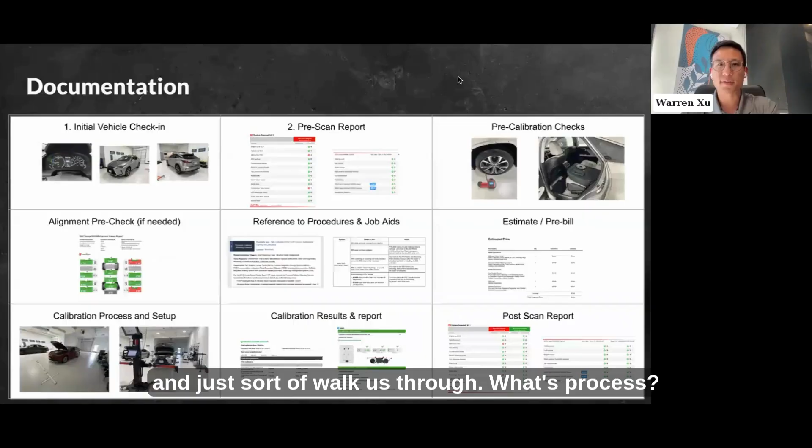So next we're going to move on to documentation. This will be a bit more of show and tell, if that's okay. Tony and Jeromy, I'm going to pass it to you guys to just sort of walk us through your process and what kind of documents you're keeping, what kind of documents you're submitting to insurance.

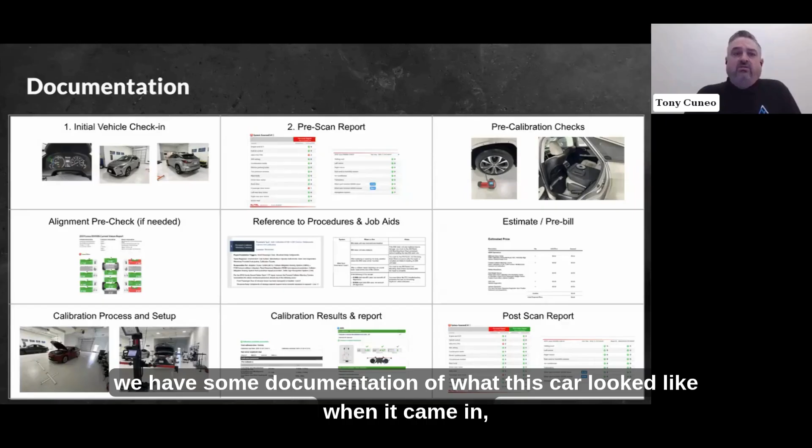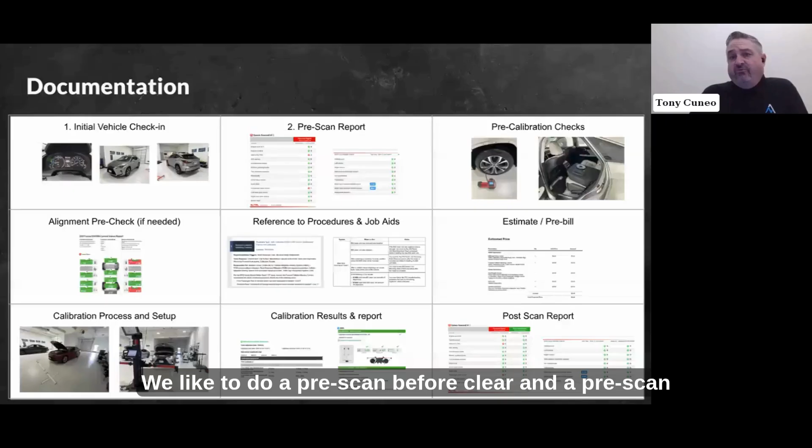So yeah, when we walk up to a car, we're going to scan it. We're going to take some photos of it. We like to get all four corners, so we have some documentation of what this car looked like when it came in, specifically focusing on the damaged area. We're going to picture the mileage and the VIN. Then we're going to get the pre-scan. We like to do a pre-scan before clear and a pre-scan after clear to see what's really related to the accident, see what codes are hard faults, and assess those from there.

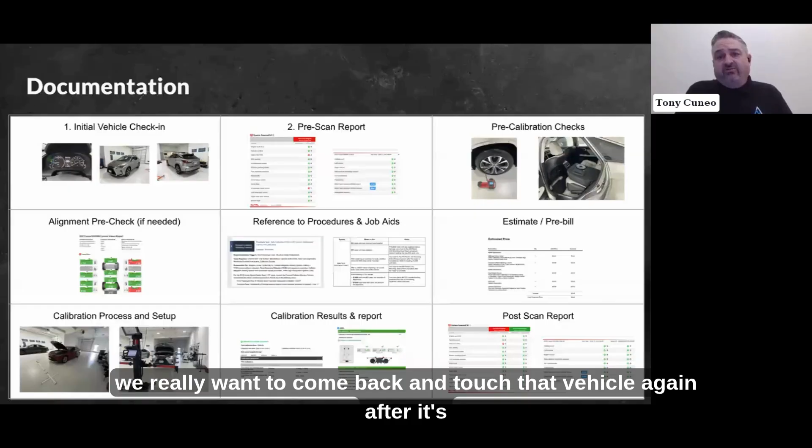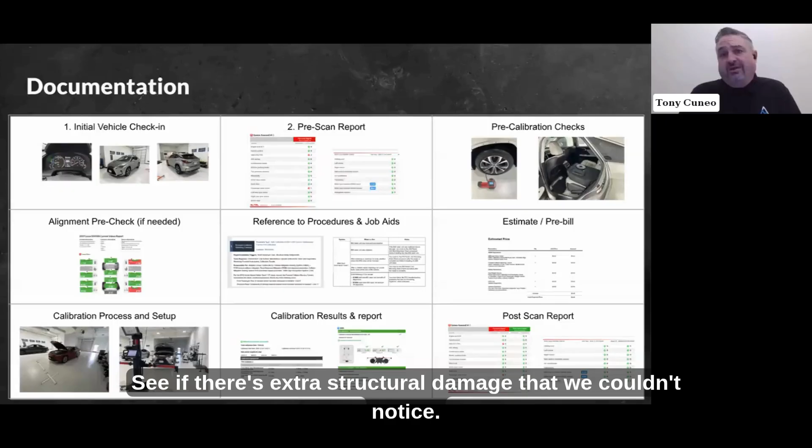When the car's coming back to us, I think even before a pre-calibration check, by checking tire pressures and fuel level, we really want to come back and touch that vehicle again after it's torn down to see if there's anything that we missed during the pre-scan process, to see if something got damaged under the bumper that we couldn't see, if there's any wiring damage, things like that, see if there's extra structural damage that we couldn't notice. So coming back to the car and getting hands on it after teardown is a really important step in our process.

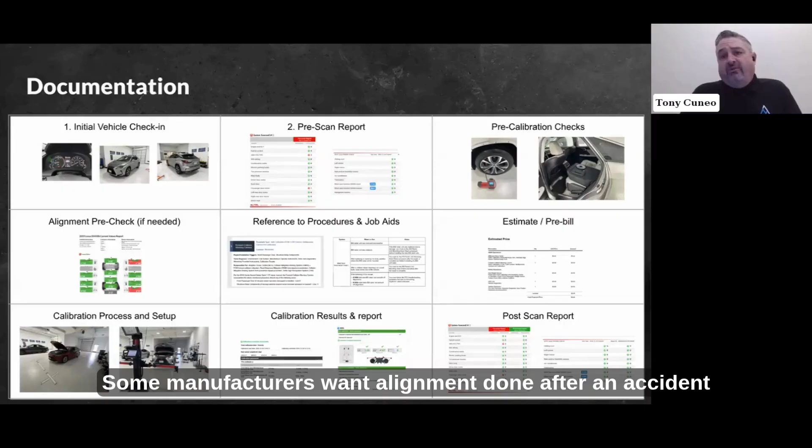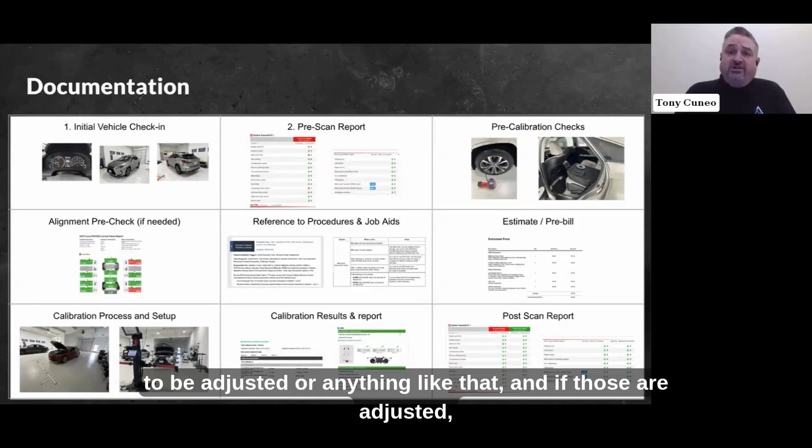Some manufacturers want alignment done after an accident, or at least checked. So getting it on the alignment rack and seeing if any calibrations or alignment angles need to be adjusted, and if those are adjusted, what calibrations are triggered because of it. Then digging into service information and supplying that documentation. We have direct access into the estimating software for the companies that we work for, and we're able to load those right in there, so there's no emails or anything lost in translation.

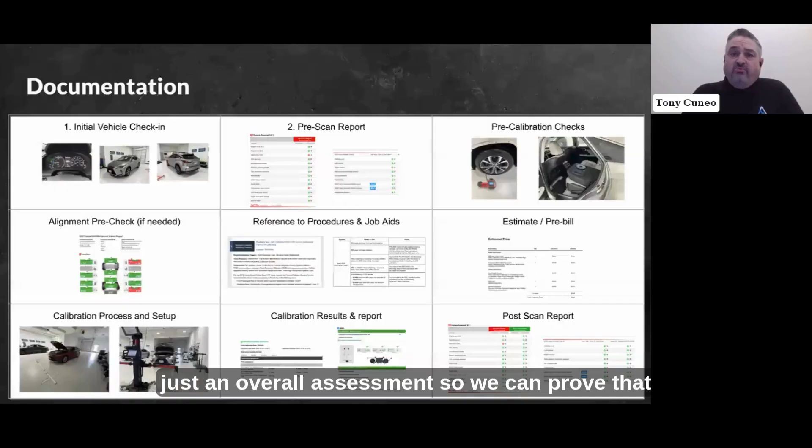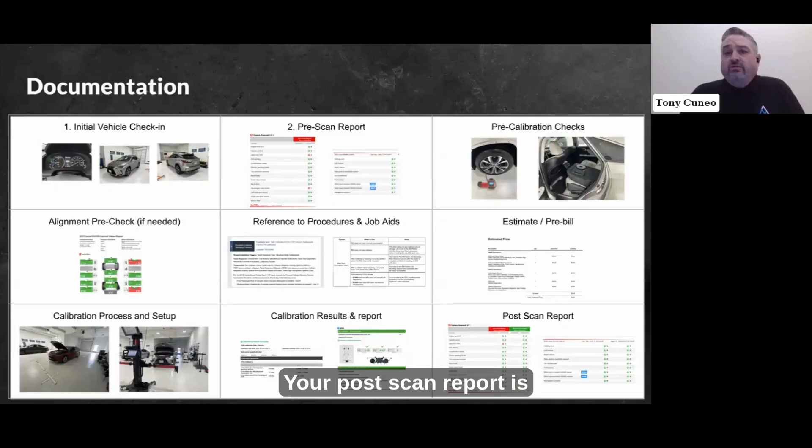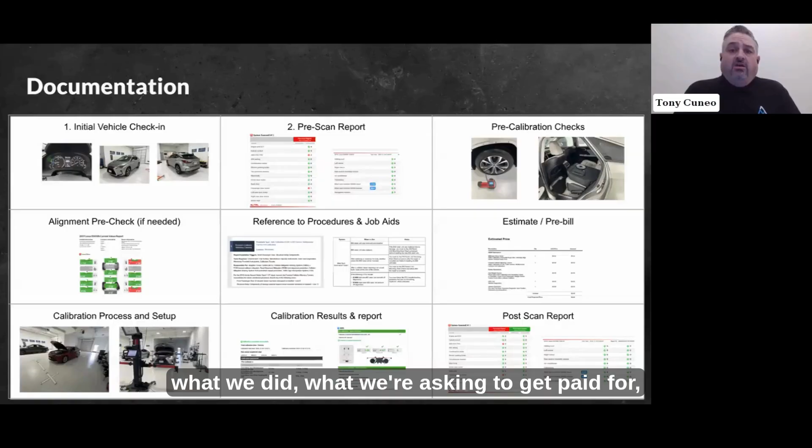From there, we're getting the calibration process and setup. We're including those documents. We're going to include photos of the setup, how far out our targets are, just an overall assessment so we can prove that we did it right. Some of the calibration equipment provides reports that tell us exactly where the targets are, so that's good information to include as well. Your post-scan report is very important, so we make sure that this car is getting returned to the customer with no codes or any problems. And then finally, the invoice: what we did, what we're asking to get paid for, just summarizing everything that we did. Thank you very much.

Appreciate that, Tony. Now, I failed to mention at the top, and it's a better question for the panelists, maybe starting with Joel: what is the risk of a shop that isn't capturing all of this information? How could it bite them in the butt? Well, I think first and foremost, if the documentation isn't substantiated as far as the insurance company is concerned, there's that immediate pushback: why did you do something? Why are you invoicing if we don't have documentation to justify why we did what we did?

I think with that as well is being able to justify to your vehicle owner, the customer, that you did what you were supposed to do in terms of validating safety throughout the repair process, and obviously post repair too, for doing calibrations and whatever else comes with that. So as a business owner, it can give you peace of mind that you've followed all the appropriate steps and provided that documentation not only to the insurance company, but potentially to the vehicle owner as well.

I think there's an opportunity to continue to educate vehicle owners as far as why things need to be done. They're buying vehicles now with more ADAS functionality and safety systems. The demand is increasing for those systems to be on vehicles as they purchase those cars. It has to be part of that conversation during the repair process, whether we're calibrating adaptive cruise controls or blind spots, and then being able to validate that information with documentation to help justify exactly why we're doing it and have those conversations with them.